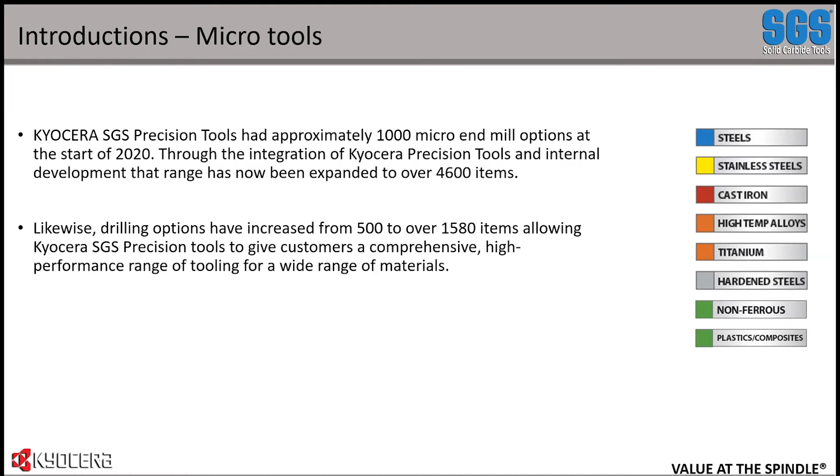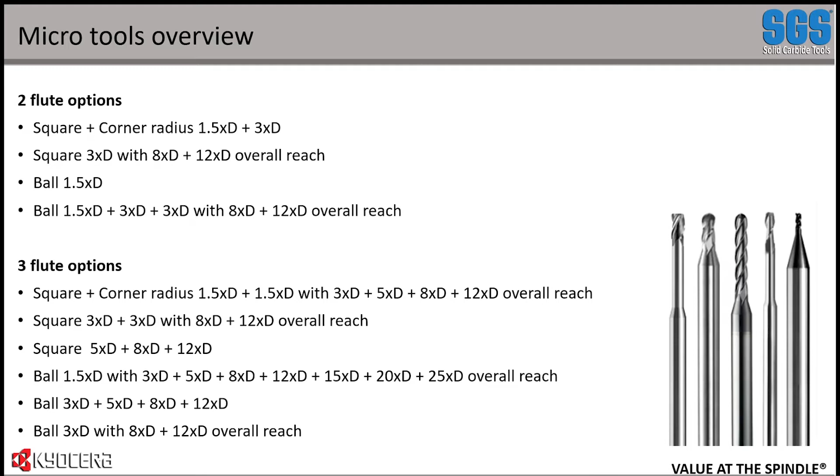The overall reach, the long reach items are really useful. We found a lot of demand for those because just getting into these tight, intricate areas on these generally extremely small components is giving us that little edge over some competition to get in there and achieve the profiles and the geometries that you need from your final component.

There's a bit more background, as a bit of a tangent. My background is predominantly aerospace, so I am used to using a nice 3/4-inch end mill and piling through some titanium quite happily. So this micro world is pretty new to me, but it's something I've been picking up as the East Coast applications guy.

And there's plenty of engineers and sales guys in our staffing that have the experience that'll fill in any gaps that come up. And if there's a very niche application in a very specific material, we've got someone there to fill in any gaps that any one of us may have.

So going back to the drills, some of the drills we've got in our micro range are excellent, especially the internal coolant option. We'll go into that in a bit more detail shortly, but we have internal coolant drills down to sub half millimeter diameter, and they are excellent.

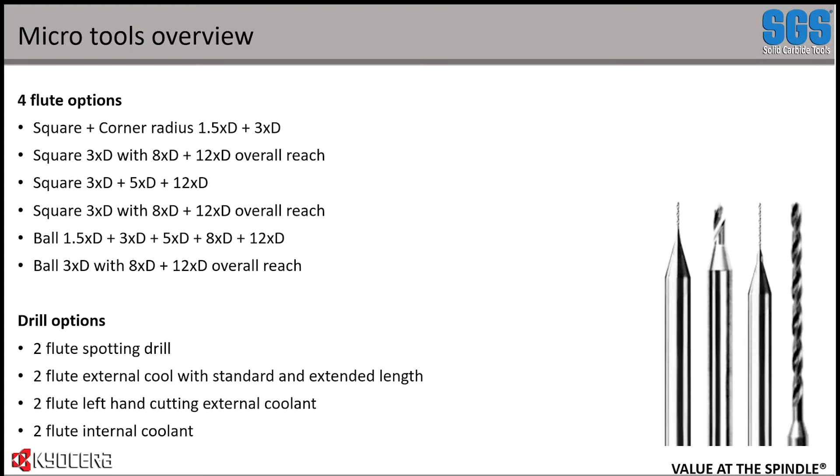So there are all the options that we have as an overview. As I mentioned, we extended our product line. So we've included all these different items here, from new diameter micro drills, new 3-flute end mills, and then additional 2, 3, and 4-flute micro end mills with a corner radius.

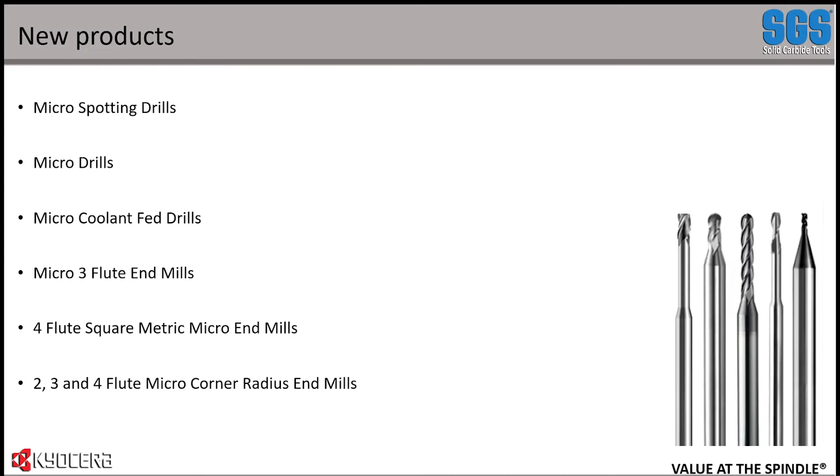So the range, as I said, in end mills is up 300+%. We've pretty much got any size fits all to suit any need and any application specifically. Then from within that, we've expanded our range of 2-flute, 3-flute, and 4-flute uncoated micro end mills, but we've also added additional coated end mills within that, and we're going to discuss some of the coatings shortly within this presentation.

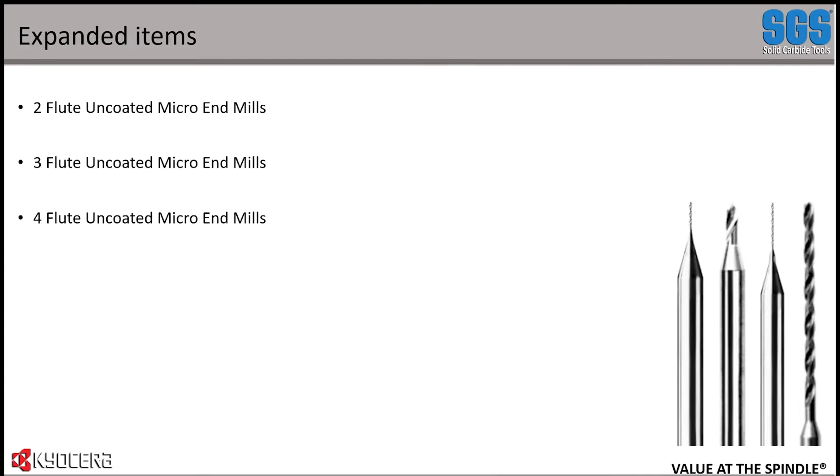Before this just becomes all series specific, I just wanted to go over a bit of background into the tool design and how these tools actually perform the cutting action that everybody requires from them.

As you all know, your different materials require different helix angles and different shearing actions because of the properties of the material. So you can have a really high helix angle, which gives you great cutting action, but it reduces the rigidity. Some of the lower helix tools—

for example, some of the end mills are great for the aluminum applications, but we don't actually have aluminum specific micro tools like we do in our standard or high performance range above 2 millimeters, for example.

Here, obviously, when you're working with these such small tools, you've got a lot less material to apply complex geometry to. But we have got in there as much detail as we can when it comes to the helix angle, the rake angles, and the other geometries that make up a performing tool.

So as it mentions, just that last point, the degree of the helix angle will determine the rate at which the chips are evacuated. So you've got a really tight helix, you're going to get lots of cutting, but you're going to get slow evacuation of chips.

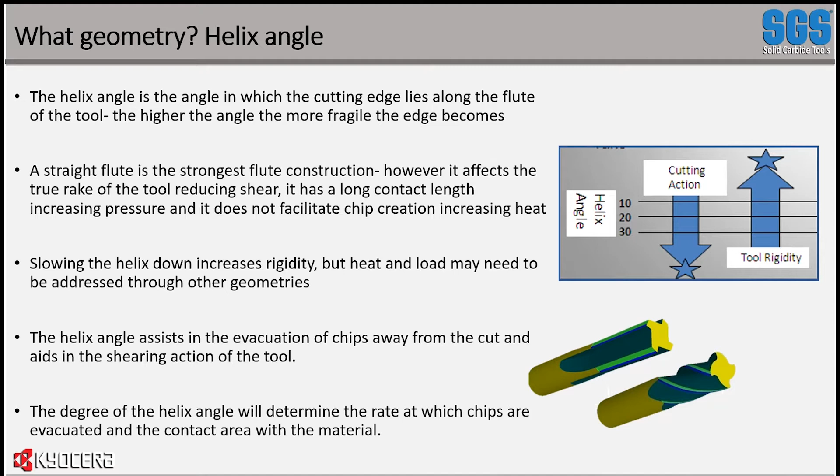The next one, as I just mentioned, is rake angles. So this really is where the cut actually gets into the material and digs out that material, and how much force is then moved into the tool.

So here it really affects how the tool performs overall, including the temperature generated. And obviously, the higher the temperatures that are generated in cutting, the sooner that you get that breakdown of the carbide substrate. So we have coatings on our tools that help protect that internal carbide substrate from the heat, and we also use the rake angles to help reduce that temperature while maintaining a good edge strength.

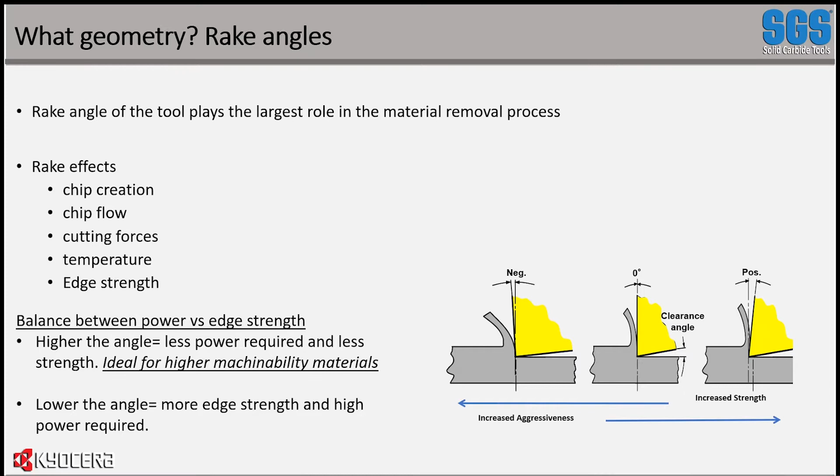So you have a positive rake angle, and you get less strength, but you can go more aggressive. You have a lower or negative rake angle. You get that increased strength, but you can't go as aggressive. So it's a payoff in choosing the right type of geometry for tools, and each tool is manufactured to suit a range of applications with, as I mentioned earlier, some specific niches within there.

The last point I'll make about the tool geometry themselves is the number of flutes. I would assume everybody in this webinar has an idea of material removal and machining in general, but very basically, the fewer flutes you have, the bigger the chip you can make, because you've got more room in there. The higher the flute count, the smaller your chips are, but the faster you can machine. So it's really dependent on how you're using these tools. A 2-flute or 3-flute tool is great for roughing. A 4-flute tool in micro tools is generally considered better for finishing, because you can use high-speed machining to get those chips made and out of the way while maintaining a good level of performance.

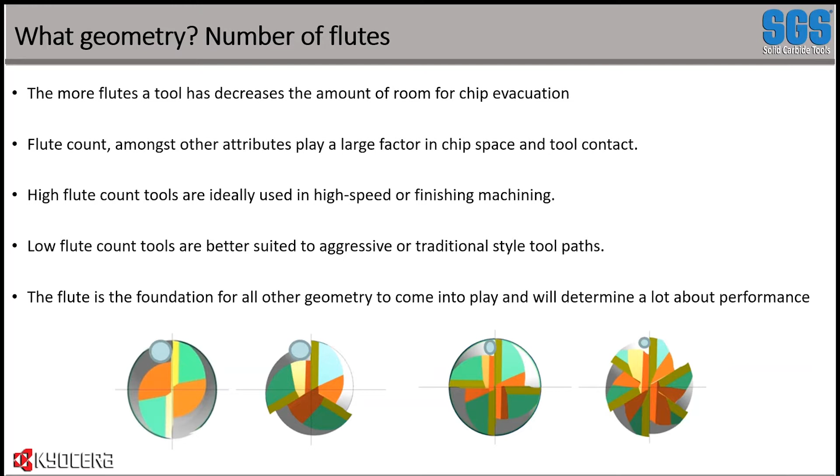So what I wanted to do now is just cover a couple of our ranges of tools, and basically the range within them, how they can be used. As I mentioned, pretty much all these tools are suitable for a wide range of materials.

So this is a spotting drill. It can come coated or uncoated. Sometimes you don't need that coating - it depends on your application, how aggressive you are. The coating will increase your tool life if you're going more aggressively. It'll help reduce the thermal heat getting into your carbide, as I mentioned. It'll also help with chip evacuation, because you've got a lower coefficient of friction, and other positive attributes that come with the coating that we'll discuss in this presentation later.

All of our micro tools are produced from a special grade of carbide, a sub-micron grade. It's across the board - not everybody has that, but it's a special carbide grade that we use. All of our tools are manufactured to ISO 9001 quality standards as well.

Kyocera SGS are one of the very few manufacturers that actually reject more carbide substrate blanks that come into our facility than we accept. We have in-house inspection capability where we look at the chemical composition and grain size of the base carbide material, and if we find any variation from its specification, we will return it. We only accept the highest quality of carbide blank.

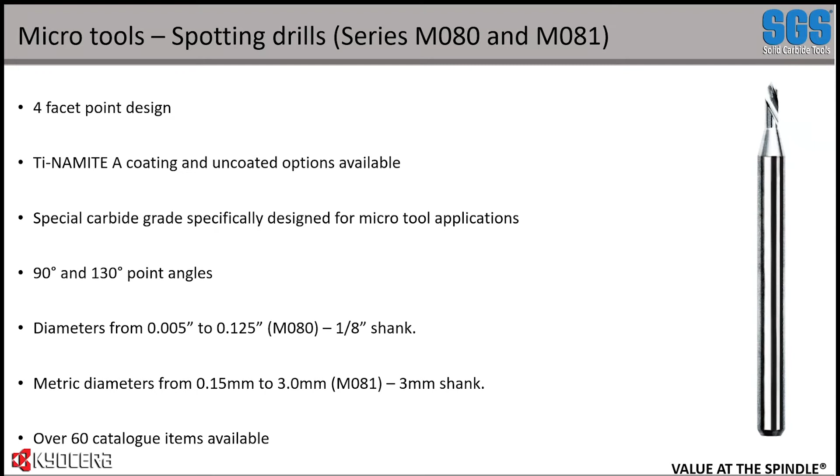More drills, the M226 and the L226 - these are left and right hand cutting, depending on how you need to use them. They come in 8, 12, and 14 times D length of cut. Again, you've got that variable point angle - when you get above a certain size, we go to a slightly different point angle to be a bit more aggressive. You've got a bit more stock there to really work that tool and be a bit more aggressive with it, as I mentioned.

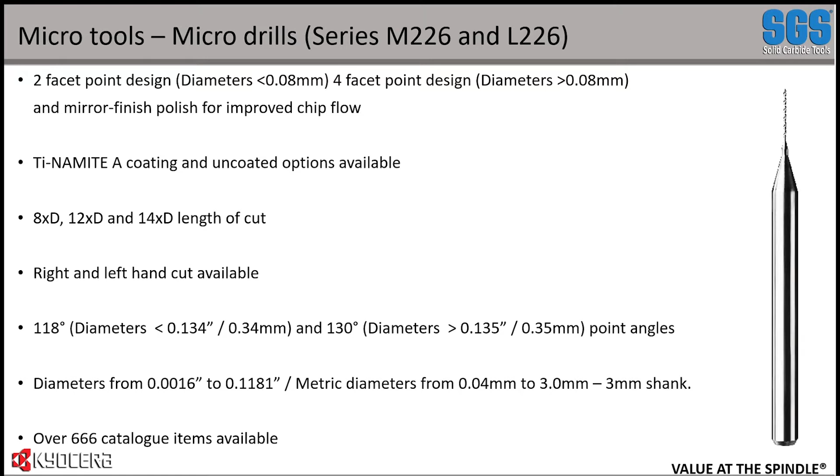Now, the ones I really want to talk to you about today are our through coolant drills, these M814 series. These are actually a micro drill with a double margin design as well, which gives you 4 points of contact when drilling over a standard 2-point drill, a single margin drill.

So what you get from that is a lot more truer hole. It's self driving in the fact that it keeps itself more straight and true. You also get kind of a burnishing effect from them extra 2 margins contacting your part. So it kind of reams the surface as it goes down, but not to a reamer level. You just get a nicer surface finish using a double margin drill.

As I mentioned, it's got through coolant, and this is down to a 1 mil drill or a 0.04 drill in Imperial, up to a 4 mil or 0.1575 inch, and that's in 1 mil increments, 0.1 mil increments as well. We've got 60 catalog items of this drill, 8 and 15 times D.

It's really excellent at just straight plunging. There's no need to peck. You don't need to spot drill. It self-centers itself. It's a fantastic drill where you need to do the deeper holes, or you need to really push production to a higher level of performance.

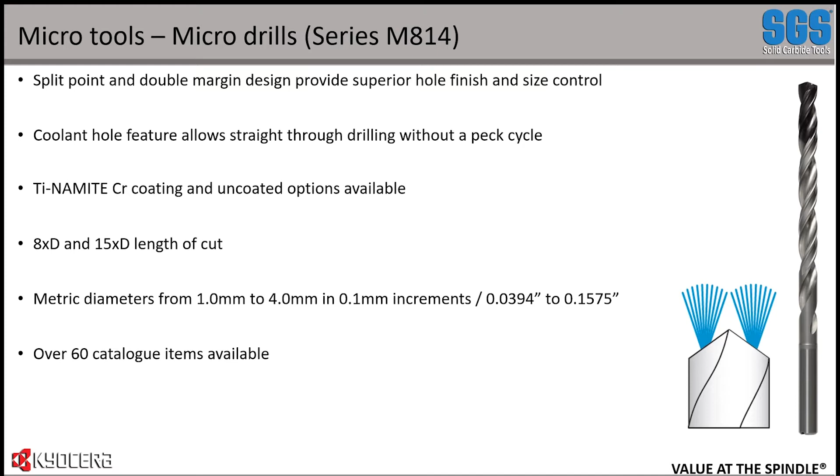A couple of end mills now we're just going to cover. The M032 - this is our 3-flute variable helix end mill. Not many micro tools come with variable helix design. As I mentioned earlier, you haven't got all that much material to work with.

So adding complex geometry such as variable helix, variable pitch, variable spacing, it really becomes tricky when you're working on these smaller diameter tools. But with this M032 includes that variable helix.

That variable helix helps reduce chatter generation by intermitting the amount of force applied into the tool. As the cut moves up the helix, the cutting action changes, and you get that difference in harmonics, which helps prevent chatter from starting, which can then lead to poor surface finish or premature tool failure.

This tool comes with our Ti-NAMITE A coating or our Ti-NAMITE CR coating. It really depends on the application specific, and that's something that you can talk to one of our applications guys about, such as myself or our sales guys.

Generally speaking, you can make either work. You might have to tailor your parameters, but if it comes down to cost and really finely detailing and dialing in your cutting setup, it can make a difference. It just depends on how in depth you need to go about doing it.

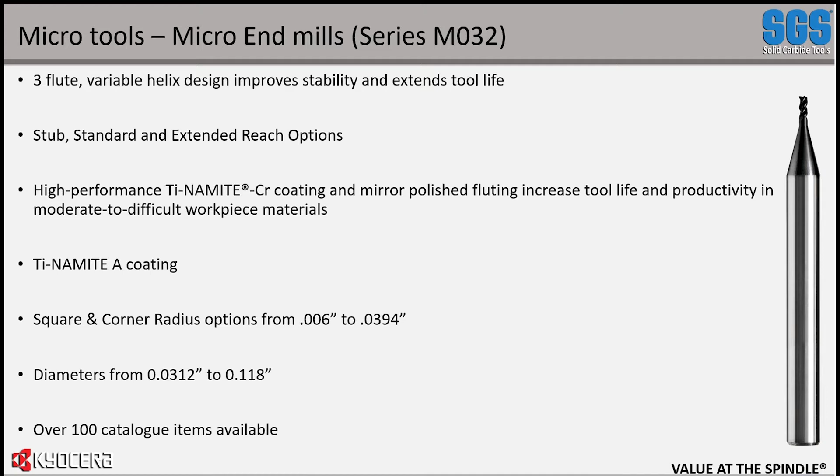Great for roughing because you've got that variable helix in there. But it's also great for finishing. You can go a bit lighter with it. It can be a one-tool solution if you need to do some roughing and finishing.

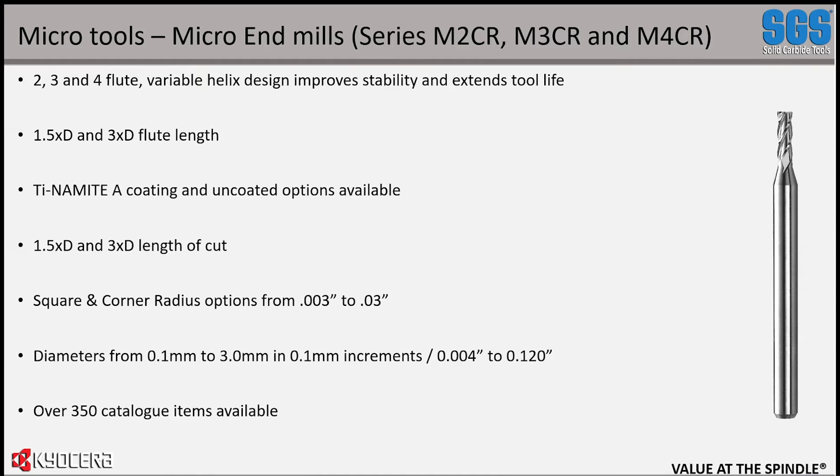So in that, I mentioned the coatings. For our coatings on our micro tools, we have 2 options. Ti-NAMITE A, which is also available in our high performance, normal, larger tools - it's a fantastic coating - but we also offer the Ti-NAMITE CR as well, which I mentioned.

Ti-NAMITE A is an AlTiN coating, so they're actually quite similar between the AlTiN and the AlCrN coatings. They're very similar hardness, very similar coefficients of friction, and as I mentioned earlier, it's all about just tailoring which coating you use for your application.

And as I mentioned earlier, there are times where you don't need a coating. If you're not really pushing that tool, you're not pressed for time, you don't need that increased level of performance, you don't need to be going at it 110%. Uncoated tools are ideal - they're a bit cheaper, you do get a lot of tool life, but you can't generally run them as hard. If you're not maxing out your tools anyway, you can balance it out and find a suitable uncoated tool.

The idea of a coating is, as I mentioned earlier, to provide that thermal protection to your base, which if it breaks down, becomes weak, you get cracks, you get chips, and your tool will fail very quickly. With the low coefficient of friction, you get that increased slickness, that lubricity, which helps evacuate your swarf as well. And the coatings are hard, generally over 3,500 Vickers, which helps resist wear more than your carbide base material. So you get an extra level of protection in your tool to help it run for longer.

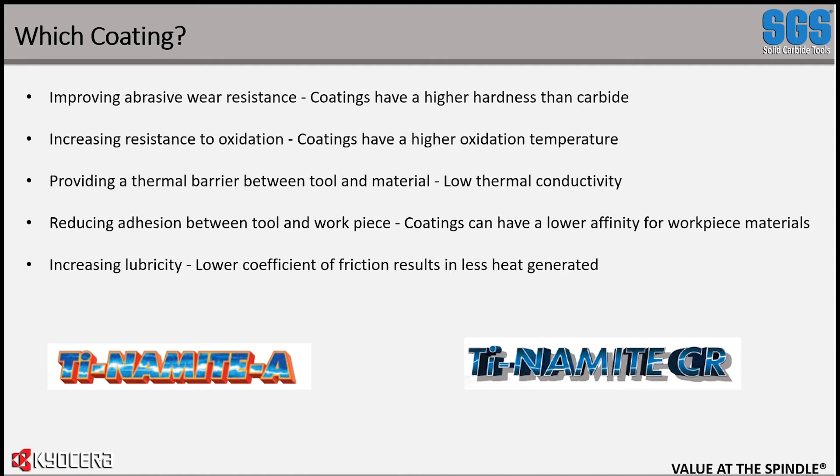Now, parameters for end mills and drills when you're talking micro tools can go anywhere from 5,000 RPM up to, in drills, 40,000 RPM, and in aluminum you can be going even faster. But it all really depends on what spindle you have and what your machine's capability is. Not everybody has access to a 40,000 RPM spindle, but a lot of people need to run some micro tools every now and then for a specific component they're making. So it's all about just tailoring the application to what you need.

If there's something on there that isn't on the list, for example platinum isn't on there and we have a customer that does some platinum machining, we can work with you specifically on a material. And if I don't have the answer on a material, as I mentioned earlier, we have a wide network of people that have pretty much been there and done it, so we can get you an answer on, well, platinum machines like X, Y, Z, so maybe try a balance between these parameters, and we'll get started. And if you need some on-site support, that is also something we can offer for your parameters to dial them in.

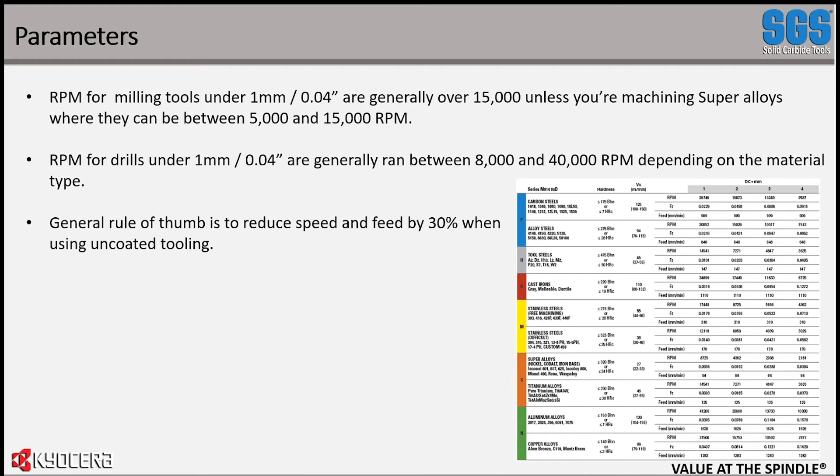One thing I do want to cover from our catalog in our micro tools is our feed multiplier chart. I've had a couple of people question me on this before, and I've actually had to figure it out myself previously. And this is for our end mills.

So what you need to do is, for some of our tools, you need to use this feed multiplier, and I'm just going to do a quick rundown over it. So for an example, we're going to use the 031 tool diameter, and we are going to be cutting 1080 carbon steel, doing a slot.

So the first thing you need to do, it runs you down, but it's nice just to be shown through it. So RPM, use the speed from the Inch-metric baseline chart. That's this guy here, 35,506 RPM. That's assuming you have 35,000 capability, but for this example we're going to assume that.

The next thing you need to do is, from the baseline chart, find your inch per minute, which in this case is 9.57, and your feed multiplier, which in this case is 0.95. So what you need to do is your 9.57 inch per minute feed is now void, and you need to do 9.57 times 0.95, which becomes 9.0915. So that's now your feed running at.

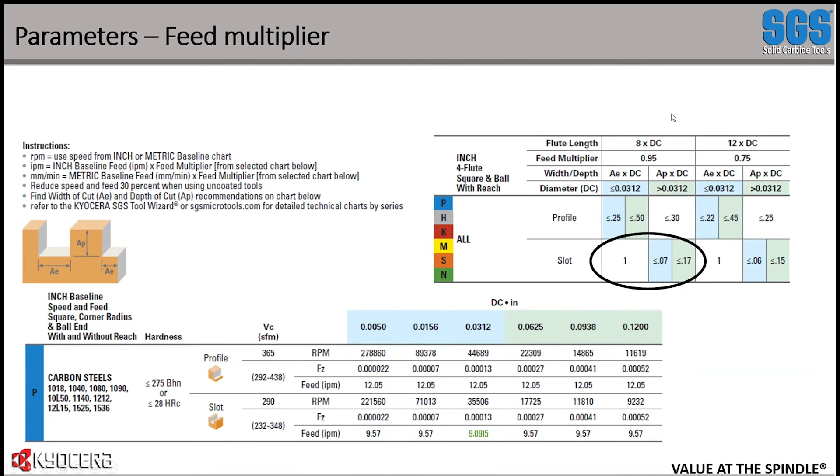One thing you also need to take into consideration here is how deep and how much radial engagement you've got. Now if you slot in, obviously you've got 1 times your diameter of cut. And here there's 2 different colored scales. So if you are under or equal to 0.0312 diameter, you need to use 0.07 as a multiplier, or if you're above 0.0312, you can use 0.17 as your multiplier. So again, 0.0312 times 0.07, your AP is 0.0021.

Now that's our guideline. If you want to go deeper, by all means go deeper, but just vary your feed, vary your speed, go a bit easier on the tool. Again, it's all a case of dialing it in and making it work for you. There's no reason why you can't go deeper, you just have to be a bit more gentle on your feed, so you're not bending the tool as much as you would going less axial.

So that's just an overview of that. It can be a bit daunting the first time you look at it, but once you go through it, if you try and go through it the way I just showed, doing effectively a line at a time to give you your corrections, you'll be fine on any application to get you a starting set of parameters and a starting axial or radial depth of cut.

And from there, you can get it on machine, you can listen to it, you can feel it, you can see your surface finish, and you can look at your tool and say okay, well tool wear is good, surface finish is good, but we want to go a bit deeper, or we want to go 10% faster. And that's when you can start playing around with your parameters and your depth of cut to get the most out of it, if that's what you feel you need to do.

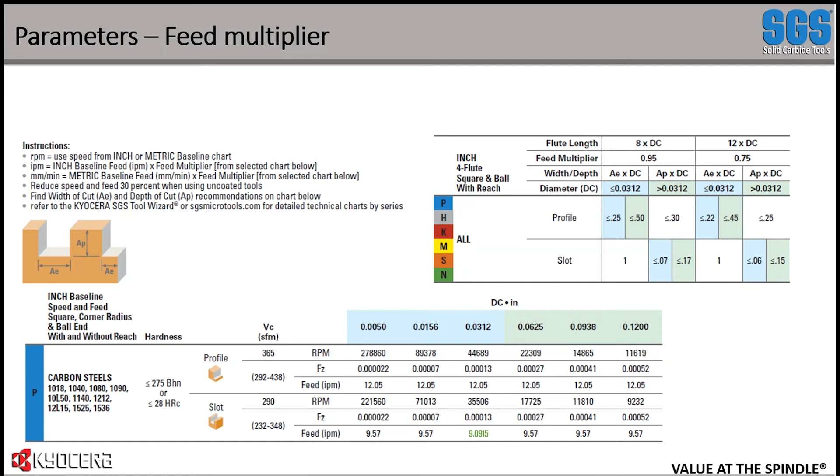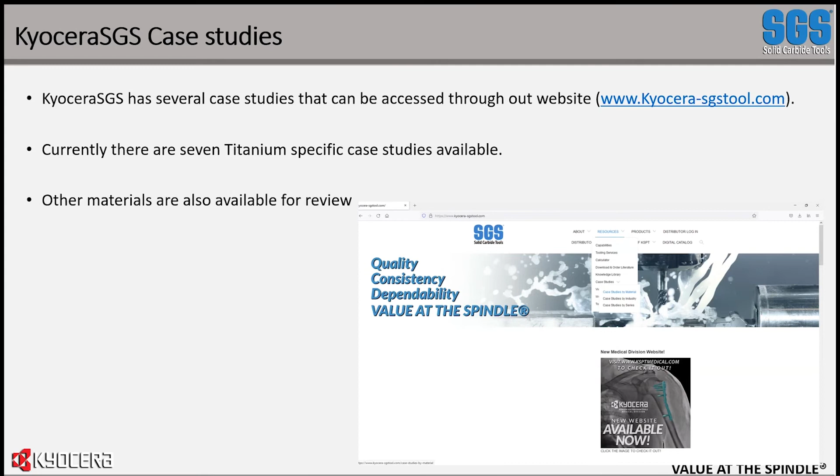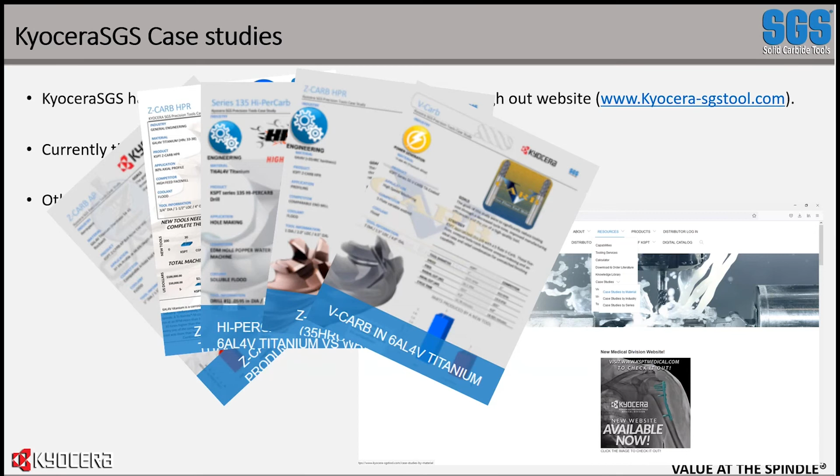One thing I do want to share with you is our case studies on our website. Go to kyocera-sgstool.com, into resources and case studies. We have multiple case studies where we apply different tools to different materials, go up against competitors, or go into a new setup, and document our results, showing improvements, parameters, metal removal rates and cost savings in real world applications. These are growing all the time. The ones I've just shown are the more standard sized end mills, but as we do more work with companies and share information, that library will keep growing, with more and more micro tools as it develops.

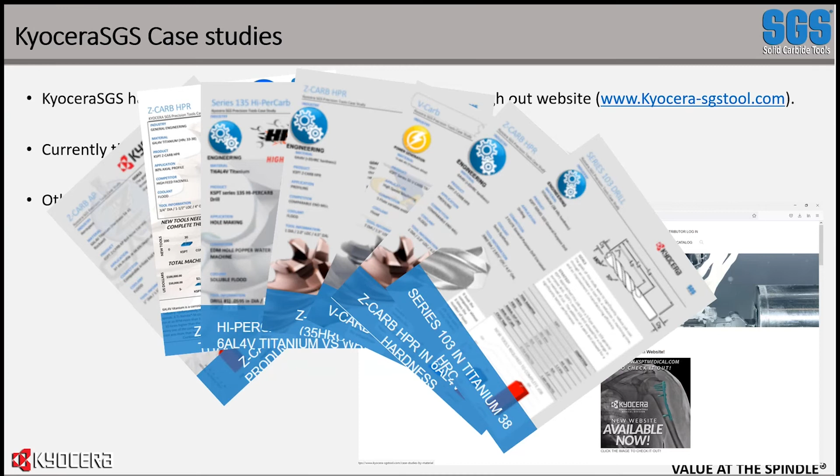What this calculator will do is narrow down suitable tools for your application, and it will give you suggested parameters that can also give you a baseline. It's a great way if you just quickly need to find something, you don't want to go looking through a catalog, or you can't get hold of your distributor, or you want to start by calling the SGS guy and saying, look, I've been on your tool wizard, this is what I need to do, this is what I've put in, and it suggested end mill B - what do you think?

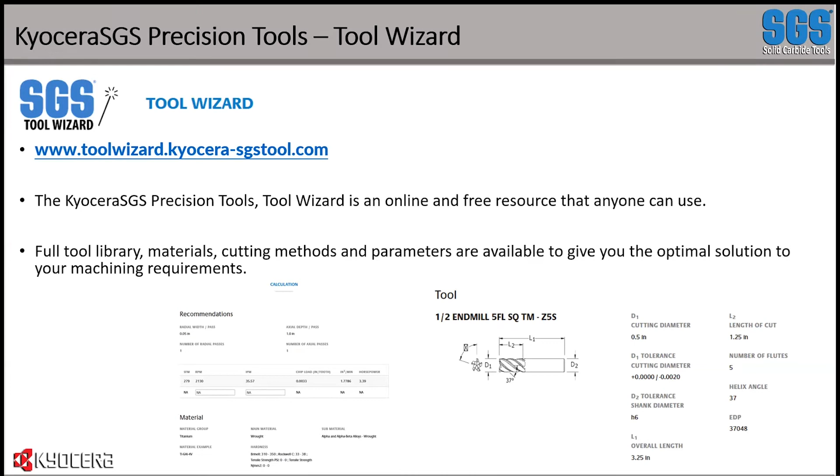From that, it'll give you your tool number, which you can share with the sales guy along with the parameters, and we can look into it and say, how's it fixtured? What's the part like? How well is it set up? We can turn around and say, yeah, that's the perfect tool, or we can say it's a great tool but consider these other options as well - we've used tool C in this application before and it worked really well. It's just a good baseline to get you going. It'll give you a part number, all the attributes of your tool, and the parameters to start your programming and eventually your machine.

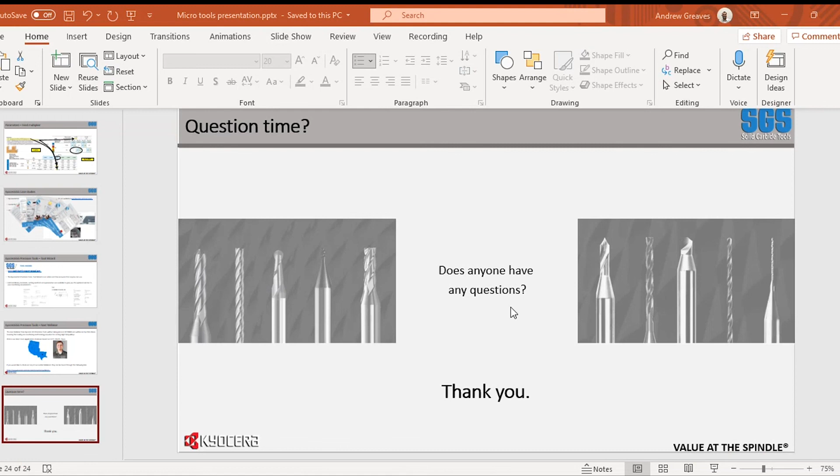Hi, Andrew, Zania, thanks for the great webinar. Thank you. Just a quick question - the micro tools, we come across ones in the mold and die industry quite a bit down here on our side, sort of taper neck solutions. Has there been any discussion about looking at taper neck micro tools to get into some weird and wonderful mold and die angles that we get into every now and again?

We do actually offer some tapered options already, generally ball end mills, including tapered end mills, but we have some square cornered ones as well. They're not a massive part of our range. For example, there's an M4 MB, which is a ball nose, and an M4 XB as well. So there are options in there. If we don't have them as a standard catalog item, that doesn't mean we can't make them for you. We have specialist centers across the United States in both Virginia and Ohio that can make tools as what we consider specials. So there's definitely options in there, but if we find there's a demand for micro tapered end mills, that's something we can definitely look at increasing in our range or portfolio in the coming weeks and months. Okay, perfect, thank you, appreciate that.